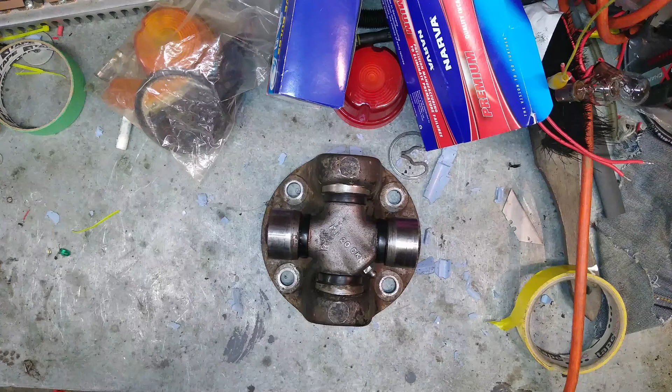So the next question you'll be asking is, how do you measure a universal so you can find a new one on the interweb or when you call the parts guy? Don't look like a dick because you don't know what you're doing, like me. It's quite easy, just a couple of measurements.

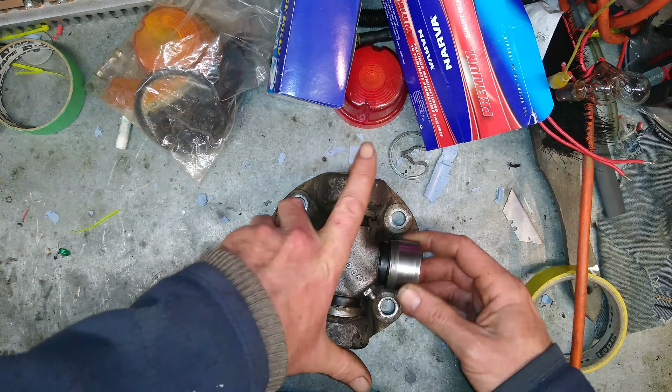You need to know three things. First is the diameter of the cup across here. Second is the distance between the ends of the two cups. And the third is where the grease nipple is mounted. Now there's a fourth one, which is what sort of cup you have on the end, because these come in many different variations. So let's go have a look on the computer and I'll show you what I mean.

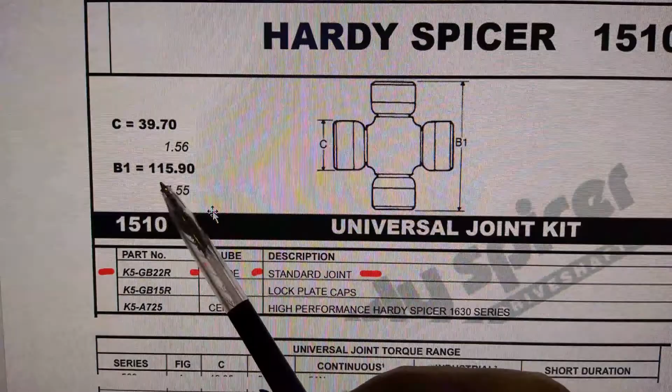So the old Bedford has Hardy Spicer drive gear in it, and once I ran some measurements on it, I pretty quickly figured out that our cup size was 39.7, and end to end on the cups or caps was 115.9, which led me straight to the Hardy Spicer 1510 series of bits and bobs.

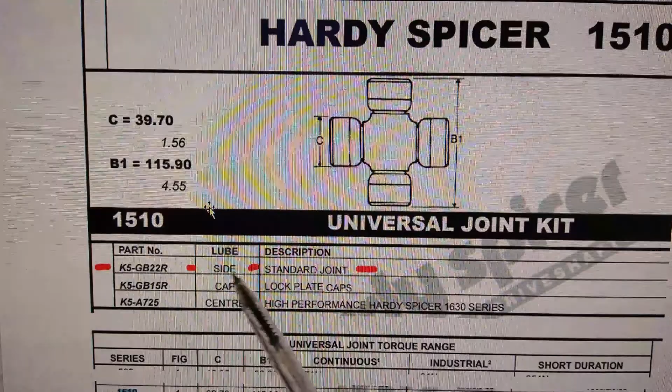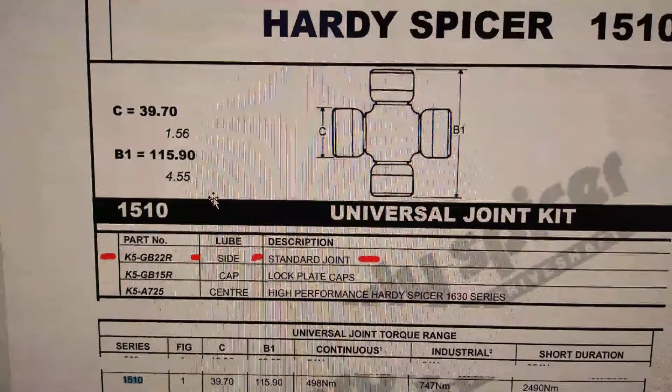So this is quite good because I now know I need one of these: side lubrication, standard joint, and that is the replacement part for the old Bedford Bus, 1976 Bedford NFM or SB3 series. Each bus could be slightly different, but a good start is the Hardy Spicer catalogue.

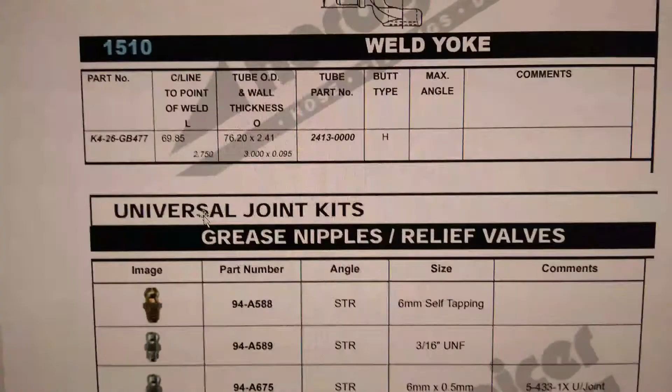And if we flick through here, it's got all sorts of interesting stuff that I've cut and pasted, right down to slip yokes which all fit the bus, flange yokes, more slip yokes. So everything I need to rebuild this bus over the years is available in the Hardy Spicer catalogue. So go and have a look in there, you'll be amazed what's in there, even right down to the grease nipples that are used in it.

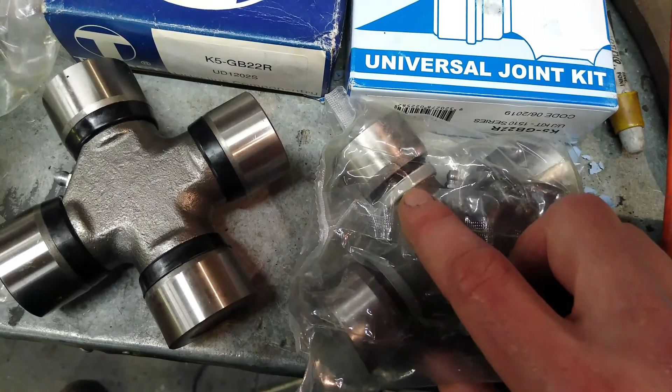The Hardy Spicer is a genuine part. The retail price for that was $260, I got it for $120. The Hardy Spicer has a dust shield over the back of the little rubber seal, so there's actually a dust shield pressed onto here which goes across the rubber dust cap. So, very good part.

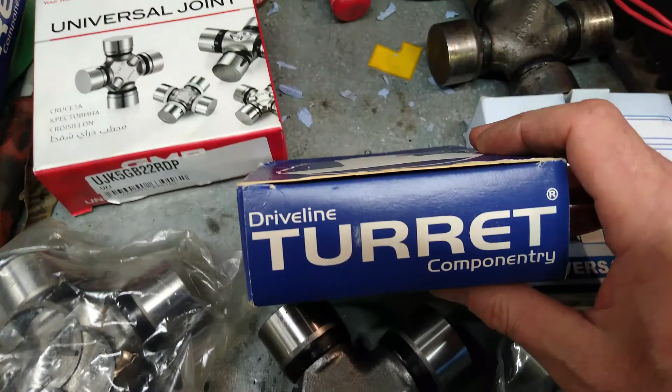The next part in price was the turret, that cost me $71. They appear to be fairly good, I don't know where they're made, it doesn't actually say on the box. So that's the turret equivalent part, the same part number. They all have the same part numbers.

And then the final one, which cost me $54, is a GMB part universal joint. Anyway, these are the universals which are going to go on, and we're going to replace all of them. I was just going to do one or two, but once I got into the driveline, I realised things weren't all they cracked up to be. It was just easy to go and replace a lot.